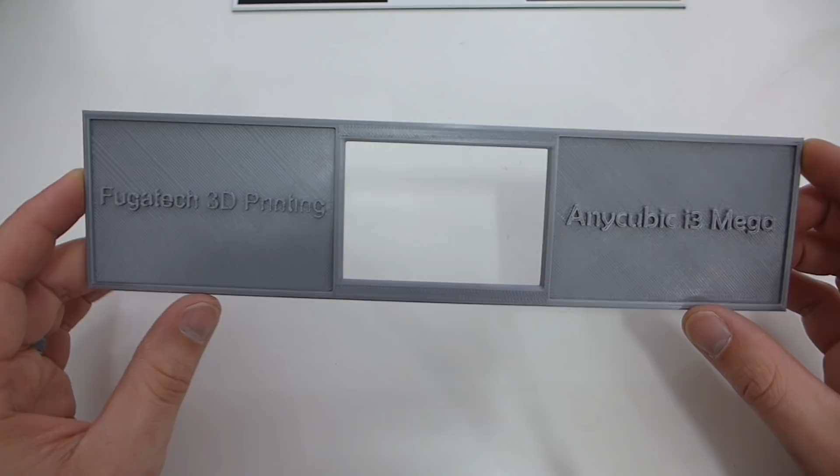So here's my very first one. This was printed in 3D Solutech Silver Metal PLA. Now this is not actually a metal filled PLA, it's just called that. It is just a silver PLA plastic.

Now you can see here I have my logo, or my 3D printing channel name basically, and the Anycubic i3 Mega there. But if we look really close, you can see the letters are not filled in. Now that is because either I suck at my settings and couldn't figure it out, or the letters are too doggone small. I'm going to go with B, because I'm pretty sure that's what it is.

My settings are pretty on par when it comes to printing detailed things, but either way, it didn't fill those in. So I was like, you know what, I need to make it bigger. And this also felt a little bit heavy. This is 4 millimeters thick. I was like, man, maybe that's a little bit too big. So I went ahead with a redesign. I took it down 2 millimeters and I changed up my lettering and I came up with this next model.

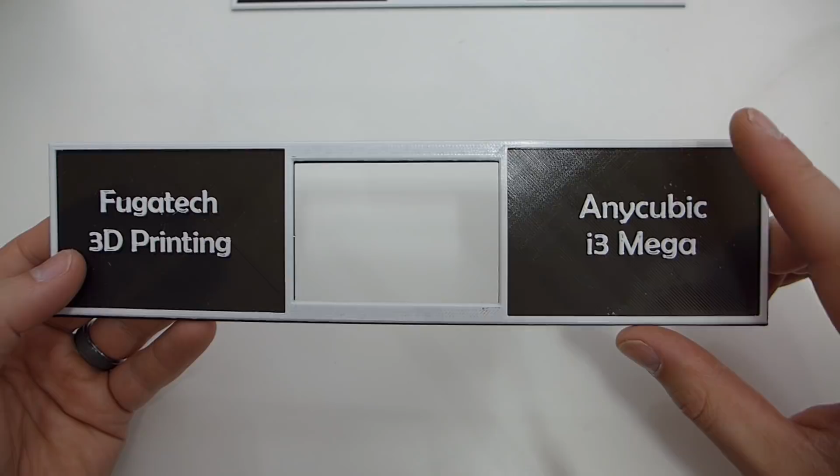This black section is actually only 2 layers, so that ended up being way too thin, and you can actually see the black come through a bit here. So yeah, it ended up being way too small. I had a little bit of shifting when I did the dual color print. But the main thing I wanted to look at here was how did the letters look, and they filled in better. Not exactly perfect, but better. So I need to go a little bit bigger on these in order to be able to fill those in.

And then we have here my final result, which I thought turned out really, really nice. Very little bit of the letters didn't fill in, but this is actually 3 millimeters thick in total, and when I did the dual color print it did not shift at all, so I got a perfectly square print right on top of the other one, and I'm just super happy about that.

And so this is going to end up being the final one that I use. And now that you see the results, let's go ahead into Fusion 360 and see how I made this, and hopefully it'll help you guys make one yourself.

Alright, so here we are in Fusion 360, and here is my completed model. Down here you can see my timeline is very short. I had to make very few changes, and I was able to get it very quickly actually. So let's run through the timeline on what all I had to do to make this a reality.

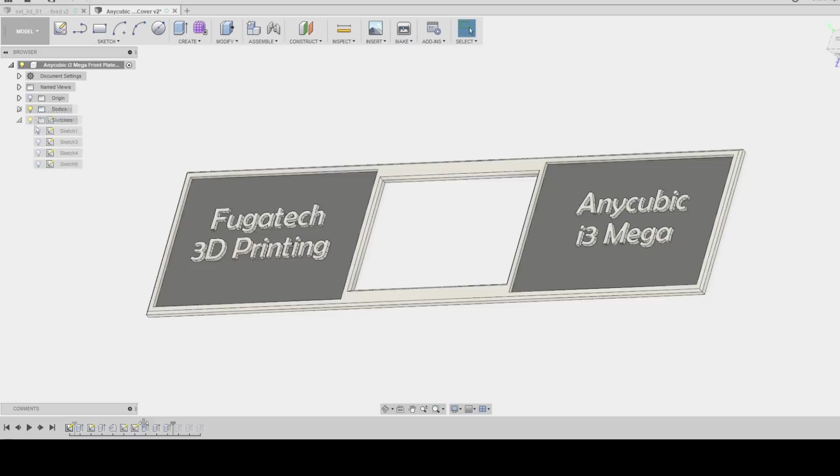And we're going to start right here with the very first sketch. So what I did is I took a ruler and pair of calipers to measure out how big the actual front plate was for the Anycubic i3 Mega. And it is 268 across by 66 millimeters high.

And then I measured the LCD cutout in the sticker on the front, and that ended up being 75 millimeters by 51 millimeters. I also noticed that the LCD is completely squared from left to right and top to bottom, right in the middle.

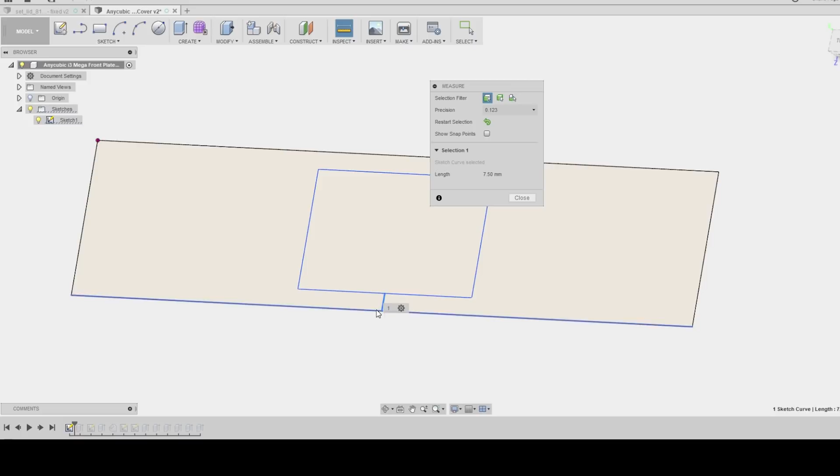So I took the 51 and the 66, subtracted them, and I got 15. So this line right here is 7.5 millimeters, which is 15 total. So I just went to the center of the model, went up 7.5 millimeters with a line, and then created my box into there. Very simple to do.

Then I went ahead and extruded this, double clicked, 4 millimeters to give it some depth. 4 again was a little bit too big, but that's okay. We moved on from there.

I created another sketch, and that's these 2 boxes right here on the top plane of this model. Now these are just to add a little bit of depth, a little bit more detail to the print, just to make it a little bit more unique.

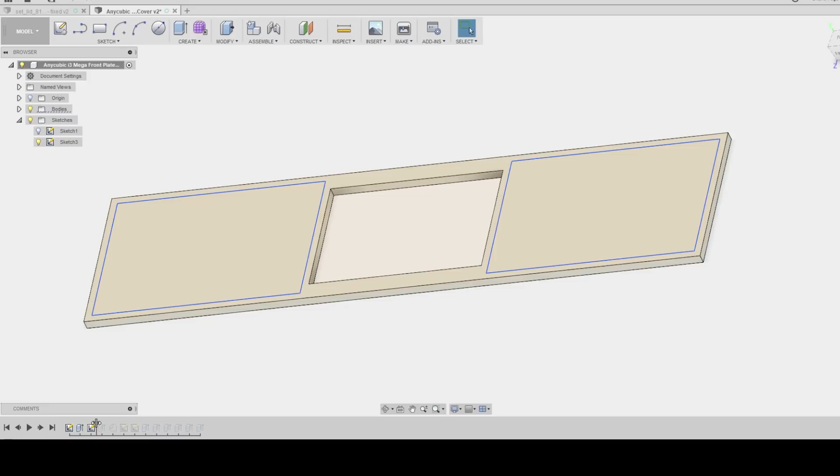And I went ahead and extruded that, and cut it, so I extruded it down into the model 1.5 millimeters, again to give it a little bit more depth, make it look a little bit more fancy.

And then I added a chamfer right here, a 1mm chamfer. Could have gone a little bit more, but I like the 1mm. I did that to the outline of the model as a whole, and then I did it to the outline of the LCD insert, or the cutout right here in the middle.

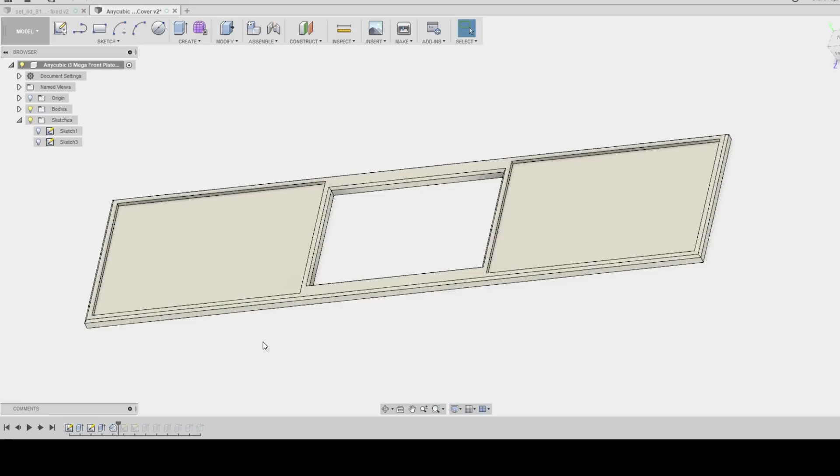I wanted these to remain square out here. Again, you can add anything you want. You can do a fillet instead of a chamfer if you want. I wanted the chamfer just because it's a nice, clean, straight cut off the corner.

Alright, next I went ahead and created 2 more sketches, and that is the Anycubic i3 Mega and the Fugatech 3D printing text. Now you saw in my first one, it went straight across on both sides. It was too small. I scaled these up.

So if I actually go into the sketch here, and then double click on the text, you can see these are 14mm high. I probably could still make them maybe 16mm high, make the text a little bit bigger, and be able to fill in those letters just a little bit more, but that's okay.

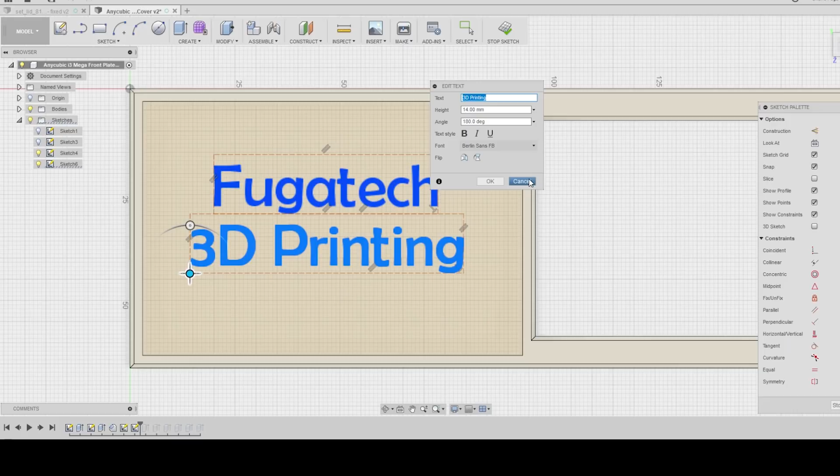And then this Berlin Sans FB is the text I ended up choosing to use for the model. You can pick anything you want, but that's just what I ended up with.

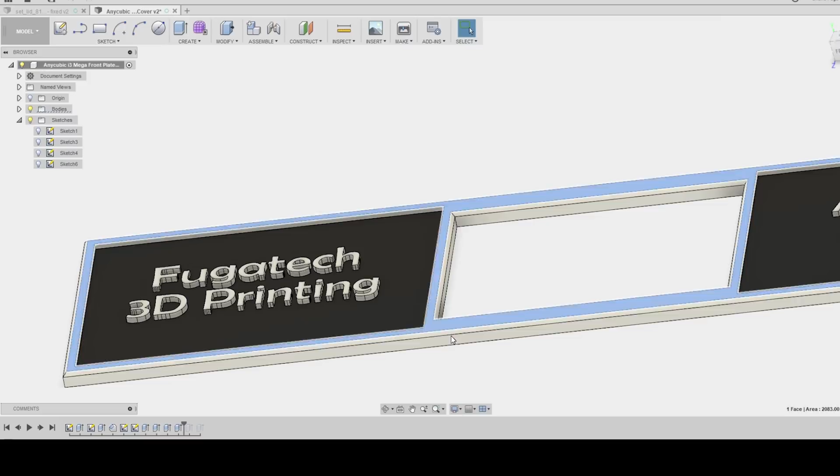The next 4 extrudes here are for actually raising up the text, and this is all raised up 1.5mm, so the top of the text meets the top of the actual model. Yeah, so the top of the text meets the top of the model and makes it nice and flat, so I wanted that to be nice and even there, so it looks really nice.

And then, so this was the first model printed out in the silver. So then I was like, well, that's too thick, so I went ahead and did an extrude, but cut into the model 2mm to make it thinner.

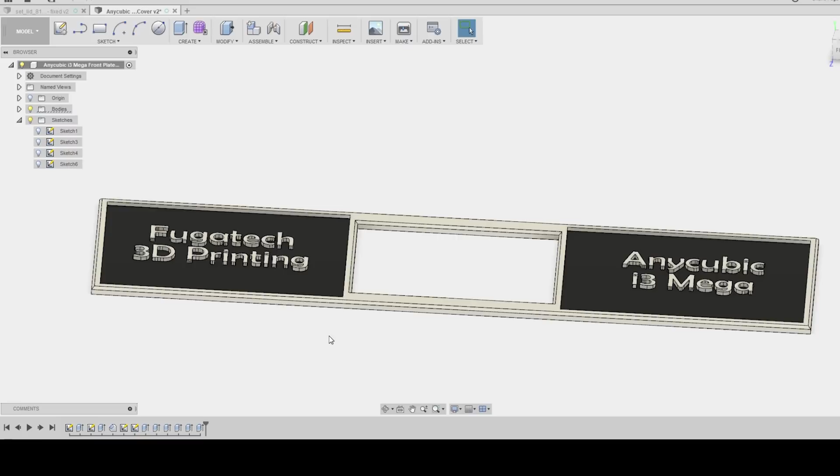Well, as we saw, this black part here was only 2 layers thick, and that's way too thin. So I went ahead and added on another millimeter from the bottom, and that gave me a 3mm total build height, and that seemed to come out absolutely perfect. And so again, this is what we ended up with.

Now with Fusion 360, once you've named your model, you can just right click up here and save as STL. Sometimes this is checked, you're going to want to uncheck that where it says send to 3D print utility, hit OK. Name your model, or if you right click where that is, it'll end up coming right up. Just do that and hit save.

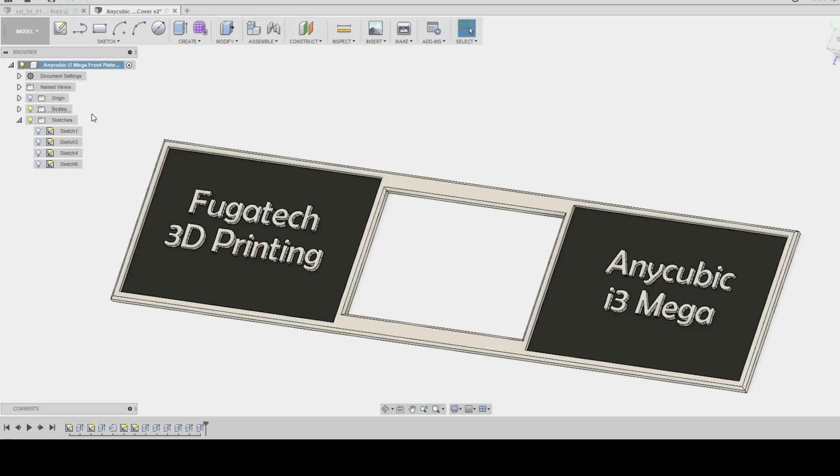You can also go to your bodies, right click the body and hit save as STL, hit OK. It's going to come up as body 1, you'll just have to rename it. But again, clicking up here on this is a quick and easy way to save it with the model, with

a name that you've actually named the file. Now you can throw it in your slicer, and if you go ahead and follow my multi prints with Simplify 3D, you can go ahead and print this out in dual color, which I did, or you can print out in one color if you want to.

And you do need a big printer for this. So sadly, I wasn't able to make this print on the Anycubic. I had to print this on my FT5, or you can print on the CR10.

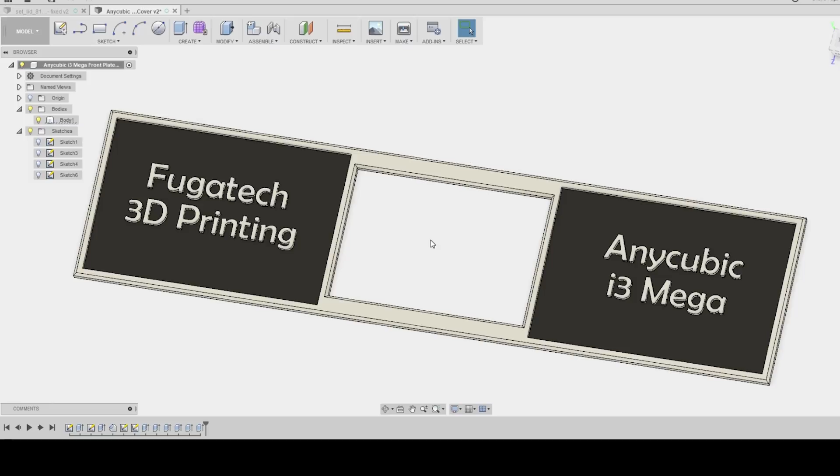You could always go ahead and draw a line in the middle here, do split bodies, and split this into 2 pieces, and then just glue them together. That would easily fit on any printer, because that would make it 140 across on each part. So that's pretty simple to do, and that way you can actually make it fit on the Anycubic i3 Mega.

So that's it, guys. It is super quick and easy to do this. Fusion 360 is a free tool to hobbyists. I'll put a link down below where you can download it for free. It is completely legal. I highly recommend that everyone out there download it, start playing with it, figuring things out.

I ask my friends all the time how to do things in the software. I am nowhere near a pro, so please don't think that I am, and don't quote me on anything, I might have said something wrong. I've just been using it for the past 8 months to edit STLs for 3D printed parts that I want to change up or modify, or things here at the house I want to fix. And it's very basic, but again, you can just start with that and build up.

This was a whole like 4 sketches to make this super easy, and I liked it. So I want to thank Devin for his inspiration. He always says stay inspired at the end of all of his videos, and I really truly believe that. So I thank him for his inspiration in making this, and now I have a pretty nifty little nameplate for the front of the printer.

And the last thing I need to do is just get some glue, take off this old sticker, slap this one on there, and it'll be good to go and look nice and fresh.